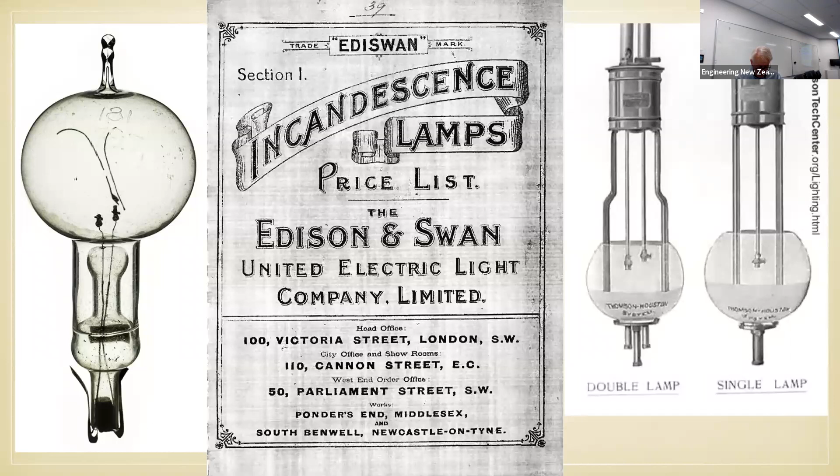We now visit the town of Reefton and the man who became most involved, Mr. Walter Prince. We know he came out from Britain in the late 1870s and found work in Dunedin with a company supplying mining equipment. He must have had some knowledge of electricity, for in 1884 he supervised installing electric lighting and motors at the Phoenix gold mine in central Otago.

Prince first visited the gold town of Reefton in 1883 to investigate using the Inangahua River as an energy source for electricity generation. He also travelled to many other locations up and down the country at the time, whenever an inquiry came from those interested in having electric lighting.

Reefton investors asked Prince to come on his second visit to give practical demonstrations. He came with a 1 kilowatt dynamo connected to a steam engine at Reefton's brewery to power lighting in 4 of the bars along Broadway. He also held public meetings at the Oddfellows Hall, which still exists, charging 2 shillings or 3 shillings if you wish to sit in a front seat. That's about $10 or $15 in today's currency.

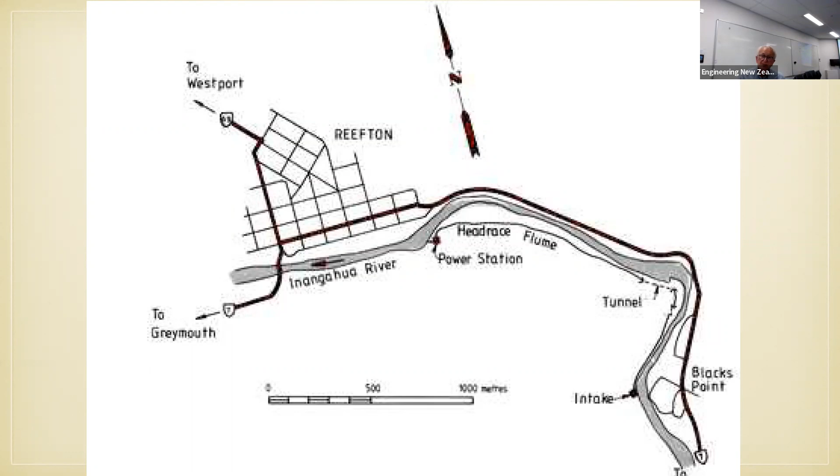His scheme was adopted and 20,000 shares were offered at 5 shillings to raise the expected capital need of £5,000, which in today's currency is over $1 million. Prince invested as a shareholder and he was retained as the company's engineer to supervise the project.

So the site at Reefton has had a succession of power stations. The first of 20 kilowatts operated until 1908, when a replacement station was built beside the old one with a capacity of 100 kilowatts. A further increase in capacity was made in 1935. The Grey Electric Power Board then took over ownership from 1946 until decommissioning in 1961.

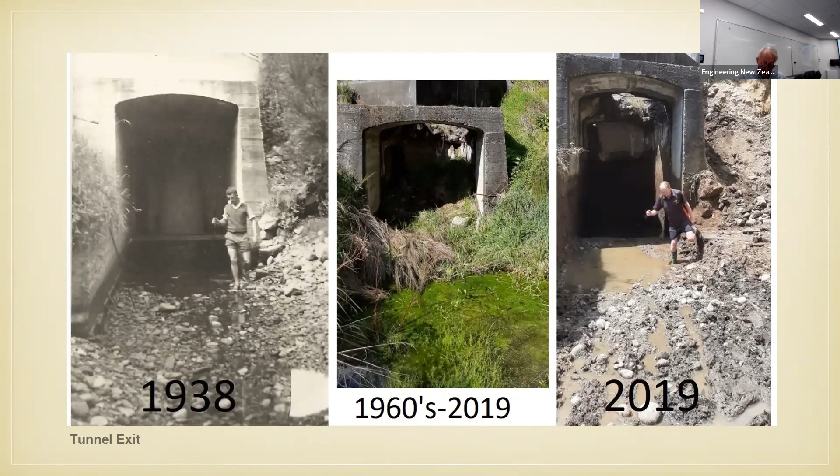These 3 photos show the tunnel exit towards the end of operating. That photo was taken in 1938. It shows the tunnel exit that I spoke about. Also, you can see that although potentially the station was still operating at times, debris was forming in the head race. The middle picture shows how nature has taken over during the years when the station was no longer there. And the right-hand one shows the beginning of work to restore that part of the head race.

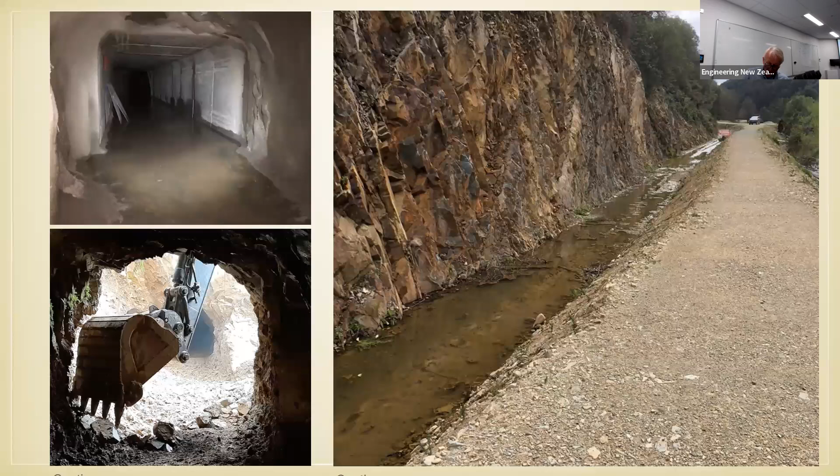This is a recent photo of the tunnel site on the exit side. The head race is still running along the face of the land here, and where previously there were concrete panels, those were too decayed to be used, and therefore a substantial berm has been put on that side.

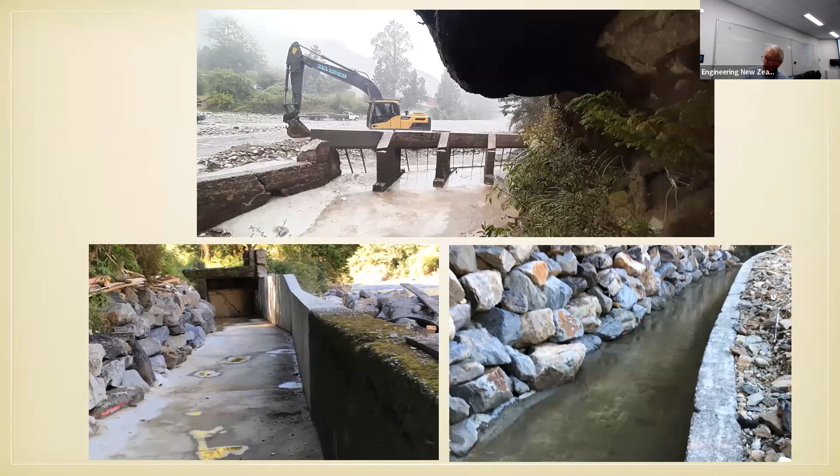This is a picture of the original intake point at Black's Point, and it will be used today. The headrace leading to the tunnel, you can see old concrete here, replacement concrete here, and rock placement on the land side.

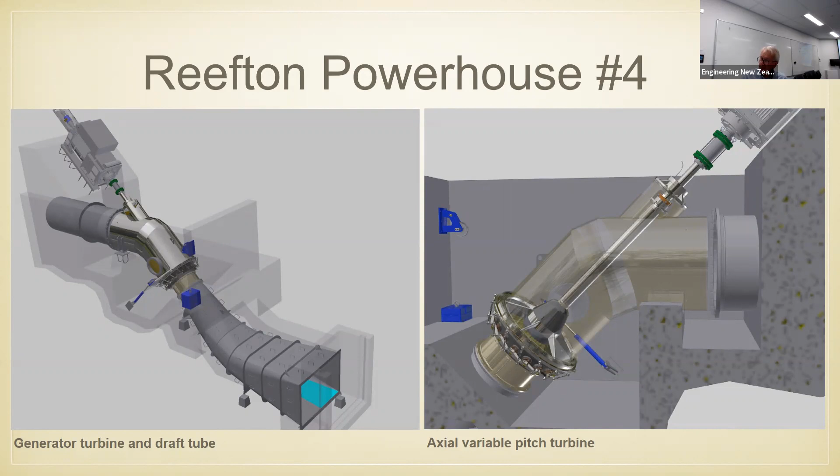The design of the new powerhouse building will replicate the style of the old building, and a removable section of the roof will allow the equipment to be installed once the building is completed. As time and funds permit, the Trust is looking forward to a commissioning later this year or early next.

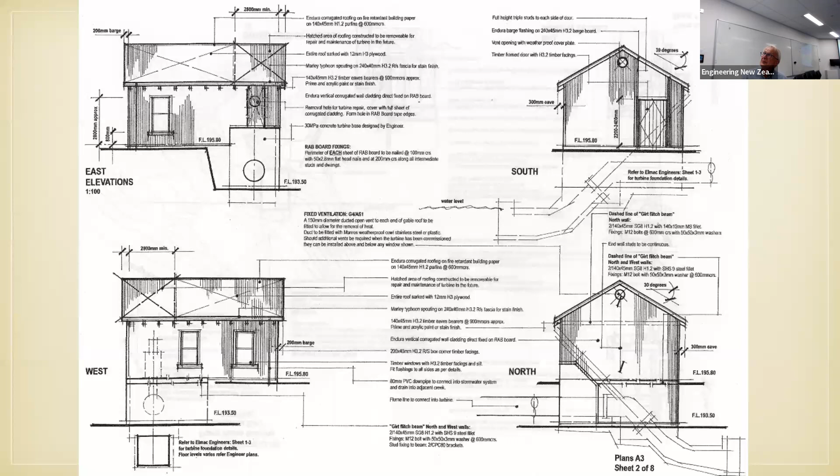So in conclusion, my involvement in this project sent me looking for examples of the earliest public stations elsewhere. There's Godalming near London in 1881. Manhattan in New York in 1882. Timisoara in Romania in 1884. And La Roche in France in 1885. And of course, Reefton can be added to that list in 1888.

So in closing, I would like anyone to get in touch if they have further information on Reefton's old power stations. Thank you.

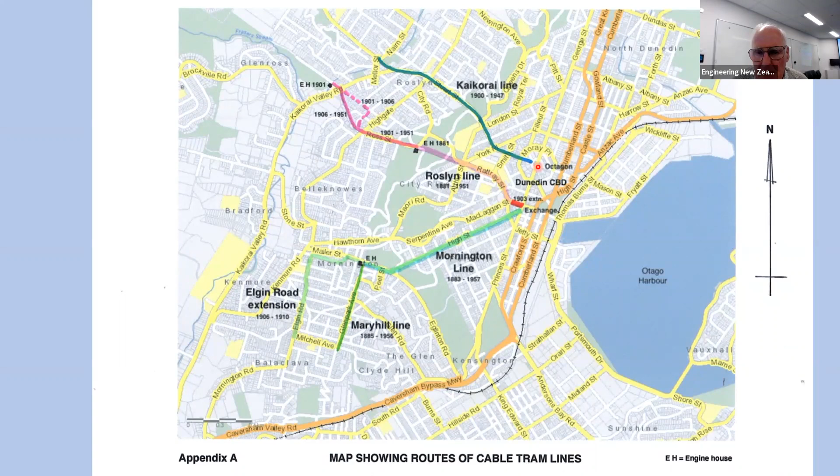So let's look at some slides. We have the original cable car on the Roslyn line, just a single track. If you can imagine, there is actually a slot in the ground, just 7/8 of an inch wide, and there was a connection between the cable car, the gripper plate, and the cable running in the tunnel here. George Duncan was a member of the engineering consultants Reid and Duncan, and he invented the pull curve.

At this corner, it was very steep and the cable car had to go around a corner. Up until then, in San Francisco, if cable cars came to a corner, they let go of the cable, coasted around the corner, gripped it again and carried on. But you can't do that on Dunedin's steep streets, so he invented the pull curve.

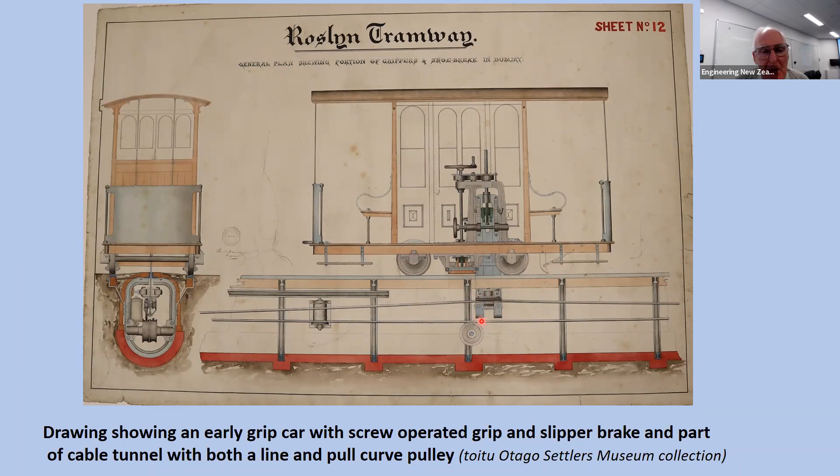Here we have a diagram of the first cable car on the Roslyn line, that's street level running through there. We have a wheel here interconnected with 2 screw rods, and as the brake was applied, the cable was released down here. Alternately, if you wanted to pick up speed, as the cable was picked up, the brake was undone.

We'll just have a quick look inside the tunnel. You can see street level here, and here's the central gripper plate coming from the car down to the gripper. You can see a cable being held there - that's the one moving the cable car - and the alternative cable in the opposite direction is running on that wheel. Part of his design for taking cables around a corner was that pulley, so the cable could run against it when it wasn't held by the gripper.

Another very unusual feature, as far as I can tell, was the fixed chafing rail in here.

There was a roller at the side of the centre gripper plate, which ran against that chafing rail. My theory is it was to stop the central gripper plate from bending. That was done away with by the time we came to the Mornington and Maryhill lines.

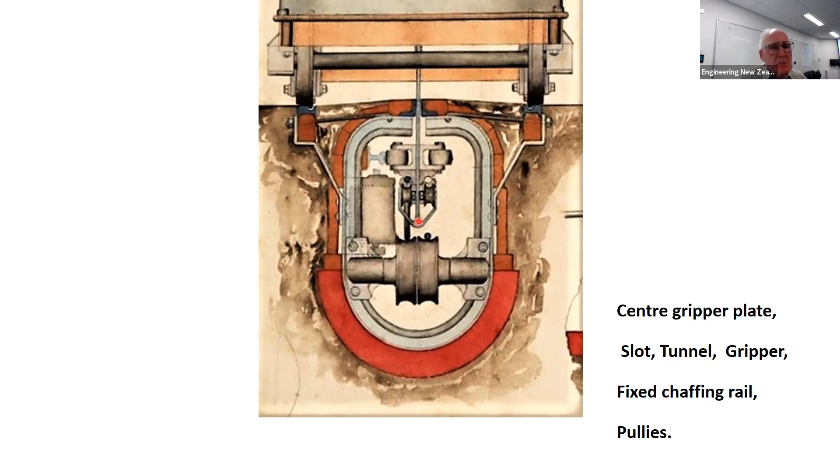Something I've noticed, particularly in the first 2 or 3 decades, was continual improvements in lots of components of the cable cars. From that small cable car, we have the modern cable car. This was built between 1906 and 1908, and it ran until 1951 when the whole system was closed down. When that happened, it was the last steam-powered cable car system in the world.

The screw feeds that you saw in the centre of the gripman's well before, they've gone, and we've now got lever systems. We've also got 2 brakes running here. Before, we only had 1 brake and the lever to operate the gripper. And there's a totally new device here - this was to apply the fell brake.

The cable car is much longer than the small one. We've even got 2 rows of seats through here, and we've got doors to enclose the cabins, which didn't exist on those original cable cars.

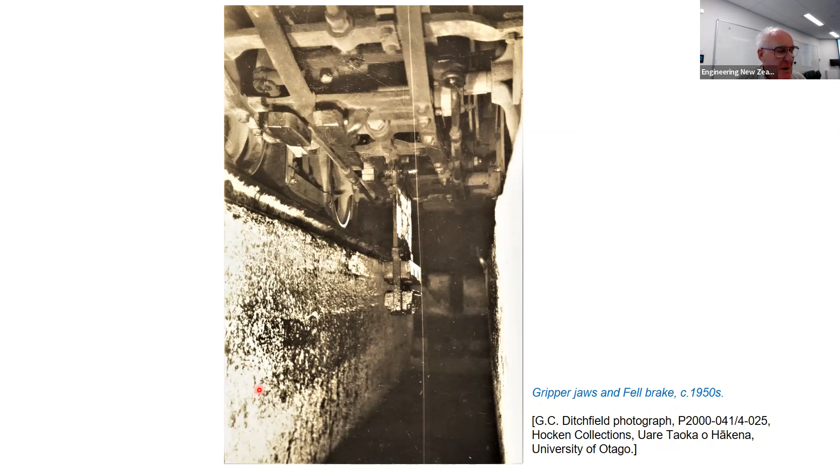This is the fell grip rail running down here, and you'll notice it's sitting proud of the ground, and the next slide is looking underneath here. It's taken in a maintenance well in the tram sheds where the men doing the maintenance could actually stand upright. This is the fell brake in here, and it came in sideways onto the fell rail.

This is a gripper. Despite the photograph being taken in very early 1950s, this strikes me as being a very simplistic one compared with other photographs I've seen. That's the slipper brake there acting on the rail at road level.

Outside again, you had to have lighting at night, and this was the kerosene light that went on the front of a cable car. There was a much smaller one inside in the gripman's well, and it generated a lot of fumes. Very quickly after that first cable car was built, there had to be a vent put in the roof to get rid of the kerosene fumes.

This is the roof vent that was put on the original cable cars. It stayed there after 1922 as a decorative ornament on the roofs. 1922 was when they changed from the kerosene lighting to a battery light, which had to be recharged on a daily basis. You can see that original battery in the cable car that's preserved up in Cable Car House in Mornington - that's there today.

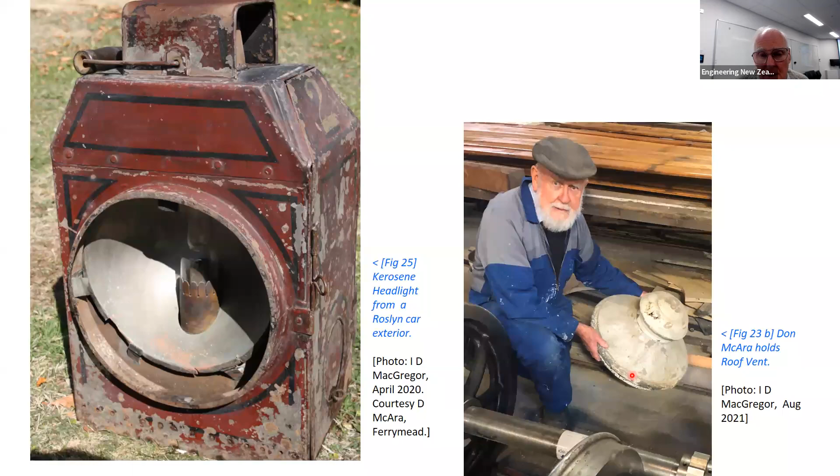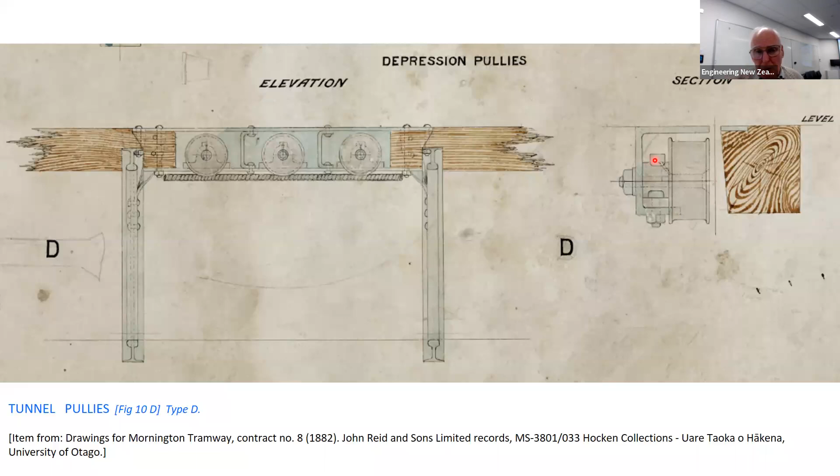This is taking the cable in elevation view from the horizontal up a slope like that, and there were depression pulleys used to do that. If we have a look at those 3 pulleys sitting inside what is a channel, there's a little oiling cup here, and I can't understand how they got the spout of the long oil can into there to oil it. It's not what I remembered.

This is what I remembered from the Maryhill line. In school holidays, I used to do the shopping, go up and get fresh bread and meat daily at Mornington Little Shopping Centre, and I would see this going on commonly on the Maryhill line. By then there was a cup that got screwed off the end of the pinion holding a pulley.

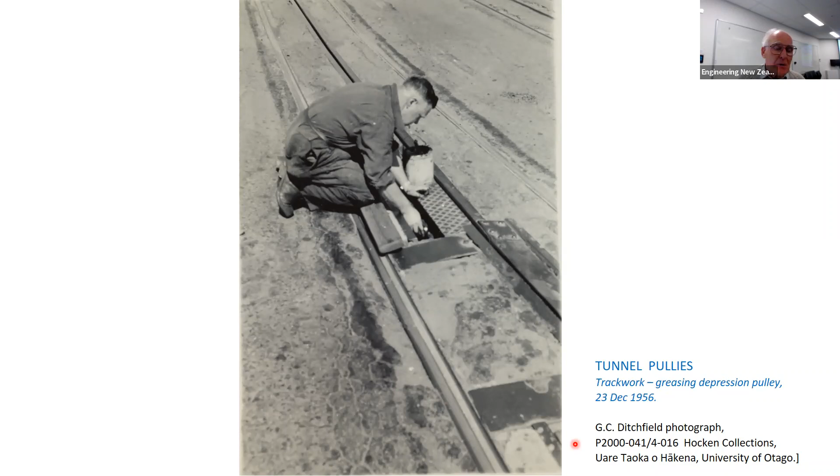It was filled with grease out of the can and then screwed back on. This photograph is quite significant because there's another pulley system here, a depression pulley system. Apart from the Maryhill line, it's the first time I've seen evidence of two sets of depression pulleys fairly close together. I'm quite concerned about the pulley system because I think the deflection angles, both in plan and in elevation, were too severe.

I've done similar measurements on the Mornington, Roslyn and Kaikorai lines where I've had photos available, and it's a very hairy process, but I was picking up angles of 25 degrees for deflection angles between adjacent pulleys.

So the cables, I think, on the cable car lines in Dunedin were subject to big stresses when they went round pulley systems. The cable life varied from 27 weeks to 43 months. A good specification was necessary, but going through papers passed on their tenders, it wasn't always followed, and Dunedin City Council would sometimes go for the cheapest price.

The British and Canadian cables were best. In World War II they couldn't get them, so they had to make do with American cables, which didn't have the life that the British ones did. They started to bunch after about 9 weeks, whereas bunching on the Canadian ropes or cables didn't start for over 12 months.

Bunching was when a single individual wire would break and form a bunch. That would then get up behind a gripper and drag the cable car forward. In 1956, one car got dragged right up to the Mornington terminus when it crashed into another cable car. I can remember that, but there wasn't much damage done, fortunately.

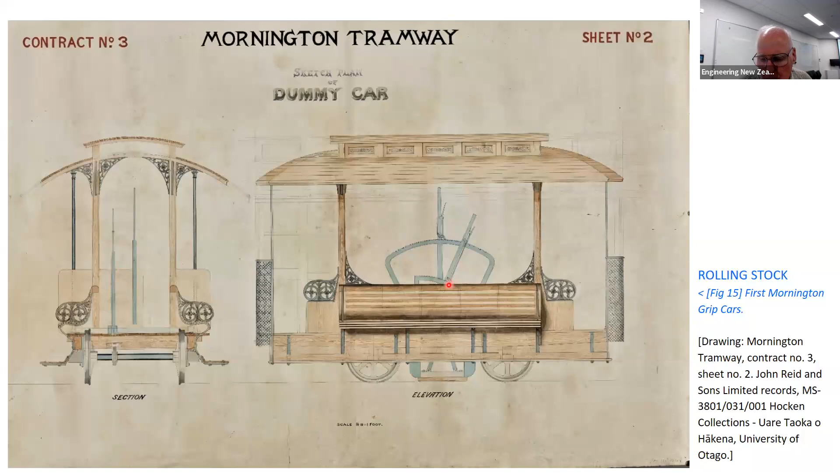This is one of the grippers that you see. There was a hole in the floor of the cable car - that's the cable car floor through there - about that long and about that wide, and this whole mechanism fitted through there. The lever would lift the cable up using the bottom jaw and clamp it against the top jaw. Set in the jaws were dies of soft metal, which would normally last about 4 weeks and have to be replaced. But with one bad cable, the soft metal dies had to be replaced on a weekly basis - an interesting mechanism here to transfer the force from the cable to the cable car.

There's a yoke running across here, a collar and a pin each end, and there was a gap in here. That was in case there was a variation in the position of the slot in the tunnel, so this whole system could move sideways if the slot was out of position.

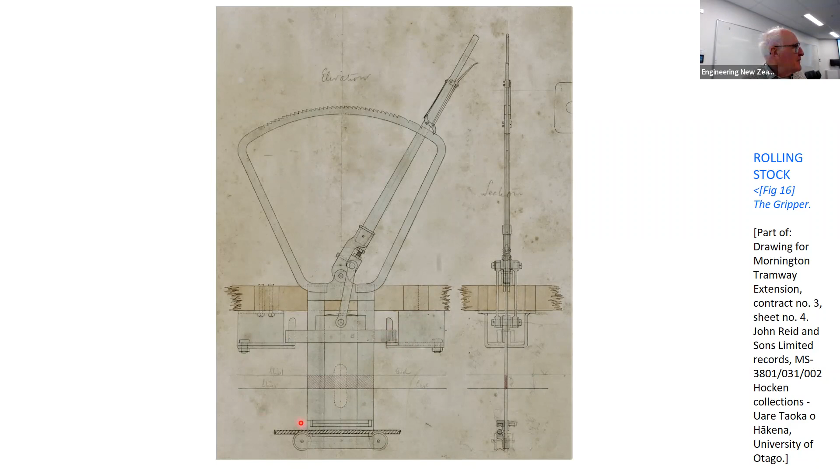Okay, we move on to brakes, and this is a slipper brake here on a trailer. The conductor just wound this, tightened it up, and the brake was applied. 70 years on, we can still see that same system working here on a trailer, with that brake system, that vent system, and the slipper there.

This was a 1911 requirement of the Public Works Department again. They were not happy with a trailer behind a car - they thought the trailer might run back downhill.

And so they required an automatic brake that would work. This got attached to the back of the cable car when it was being towed uphill. Either it could be applied by the gripman in the cable car, or if this broke, then a pawl and ratchet was automatically employed to brake the trailer and stop it from running back down to the exchange.

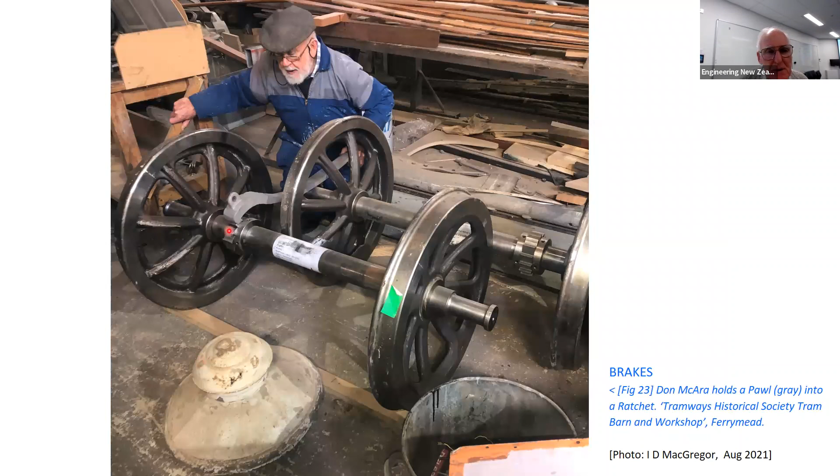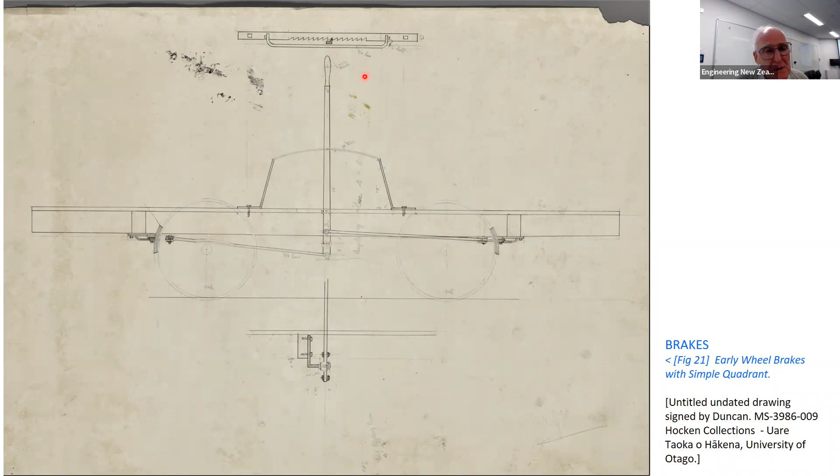This is a pawl and a ratchet in there, photographed at Ferrymead. This is the third wheel system, and it was a wheel brake in here. I couldn't understand the drawing when I first saw it, and sometimes now I know in photographs you can just pick this up. But both Miles and myself independently came to the conclusion that initially there was only one braking system on both the Mornington and the Maryhill, in the Mornington and Roslyn cars. So it's another example of ongoing improvements that there were then 3 brakes.

So looking backwards and forwards, we can be very proud of Dunedin Engineering's consulting firm, Reid and Duncans Limited. There are a lot of inventions which they did and which we haven't had time to talk about, and which they got credit for from Hallidie, the original inventor of world's street running cable cars.

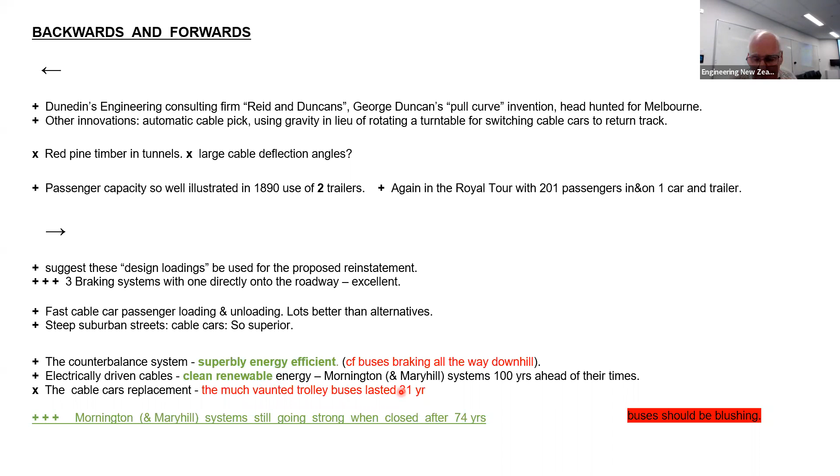And the cable cars' replacement, those trolley buses, they only lasted 31 years. Mornington and Maryhill systems were still going strong when they were closed after 74 years. And I think the buses should be blushing, as should the 9 out of 12 city councillors who voted against retaining the Mornington and Maryhill lines. Excuse me, and that's my ticket from the last day of cable cars.

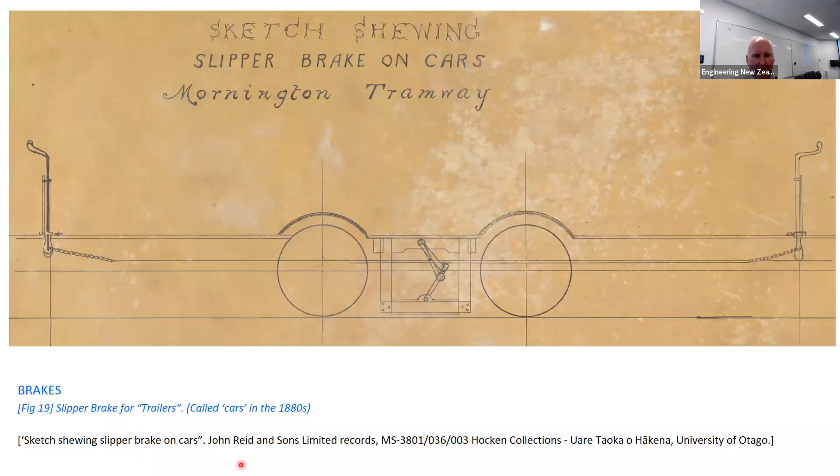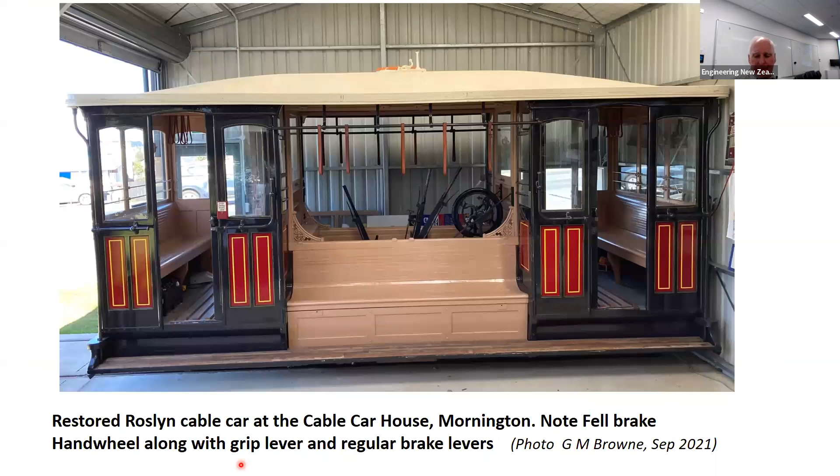If we have a look at the photograph on the Roslyn line... I haven't seen that, but you can just about work it out. There were manholes over all the main pulleys, all the way along, so these could have been opened up and they could have scraped the dirt out. That's the only way I can think of doing it. It might have been possible to wash some of the dirt out by putting in hoses.

In 1903, when that happened, it was privately owned, or it was Mornington Borough Council. There had been an argument between the owners of the cable car system and the Dunedin City Council as to where all the wash water, there was drainage getting in here, had to be got rid of from the tunnels all the time. The City Council said no, you can't put it into the sewers. Then the operating company said, but the gravel is coming off your streets into our tunnels. I'm not quite sure who won that argument, but these were available to help get rid of the material.

Now, right down the bottom of the Mornington line, there was a tensioning pit, about that high, because I've seen a photograph of a man in it bending over, busy pumping out water with a lever when he's bent over, and they could have got rid of quite a lot of dirt there. They would have had to take it along the entrance tunnel under the road and then up through a manhole that came up in the footpath. The manhole was just big enough for the man to fit through and no more.

But because there'd been a fire in 1903 and the whole of the top story of the Mornington tram sheds and all the rolling stock bar one trailer were lost, they had a period of 1.5 months to clean out the tunnels. And in that time, they got the line running again in temporary rolling stock. So they had a bit of time to do it.